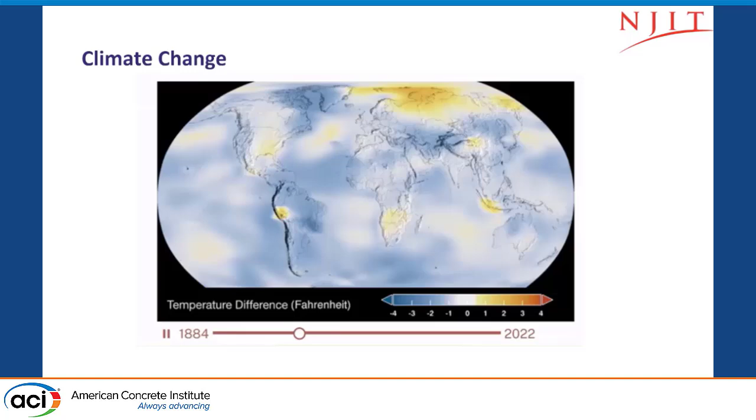We think this is a big problem, and most of those problems are due to the carbon, CO2, in the air. The climate change, as we can see here, the number of climate-related disasters tripled, and you can hear every couple of weeks about a new disaster everywhere.

The Myanmar earthquake, which happened a few days ago, was the worst—my master's and PhD is in earthquake engineering—7.7, this is something very, very catastrophic, especially since the Richter scale is a logarithmic scale. The rate of global sea level rise between 2006 and 2016 was faster than all of the 20th century.

45 million people affected by drought in Africa. More than 45 million people are struggling to find enough food across 14 countries.

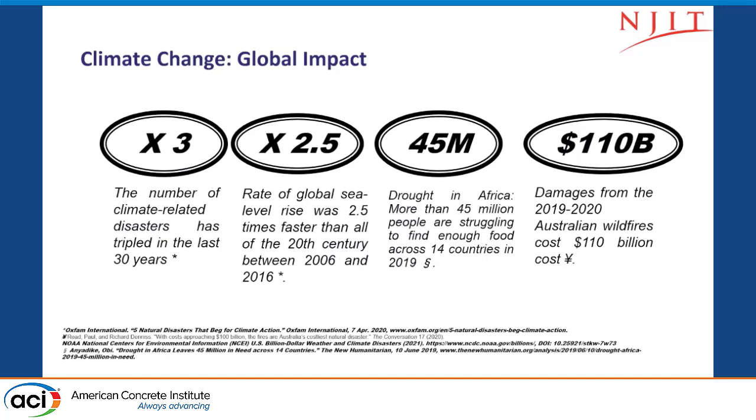110 billion dollars damage from the 2019-2020 Australian wildfire. We hear about wildfires everywhere, especially the one that happened in California recently. So this is a 110 billion dollar cost.

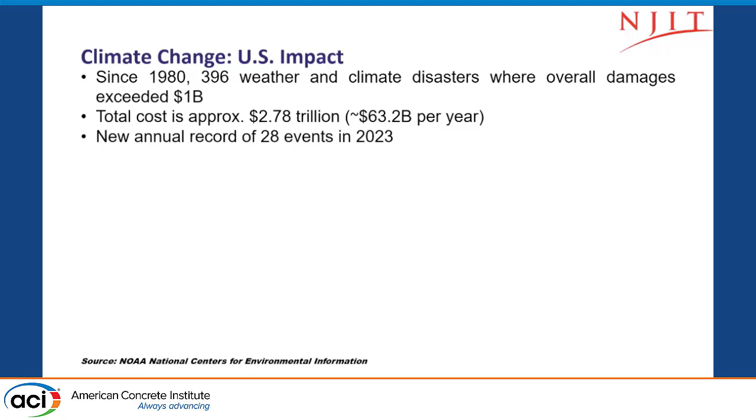Since 1980, 396 weather and climate disasters had overall damages past 1 billion dollars. Total cost of approximately 2.78 trillion dollars, which is about 63.2 billion per year. A new annual record of 28 events in 2023.

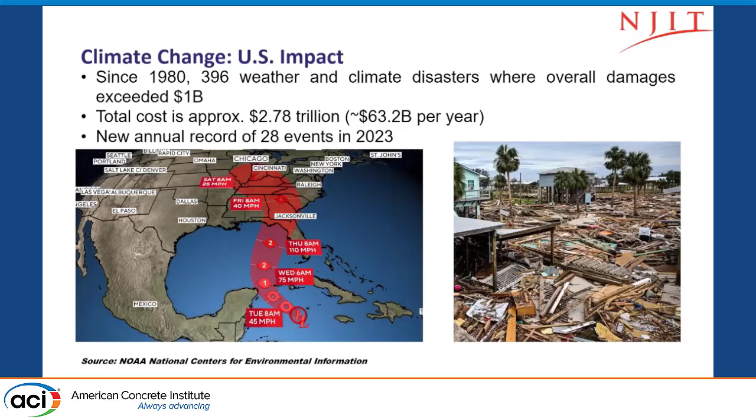That picture over there is Hurricane Helene, which happened a few months ago, September 2024, and the damage was huge. It went, as you can see, from south to north, passing by North Florida and the Carolinas. And this is a picture of the damage, as you can see.

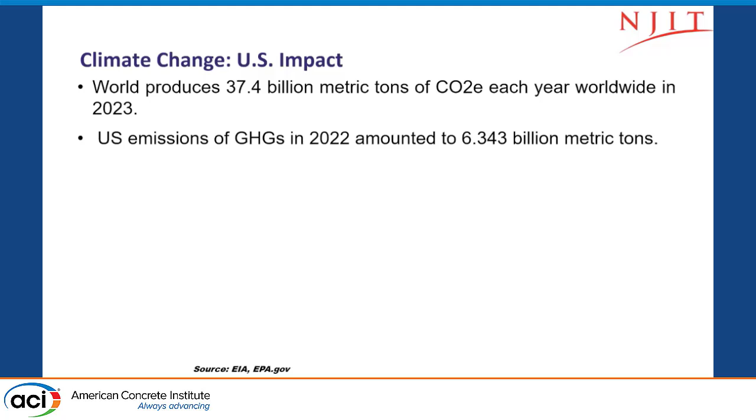World produces 37.4 billion metric tons of CO2 each year worldwide in 2023. U.S. emissions in greenhouse gases in 2022 amounted to 6.3 billion metric tons. The transportation industry is actually responsible for 28% of greenhouse gases in the U.S.

The global framework aims to reduce the impacts of climate change by limiting the warming to well below 2 degrees, and pursuing efforts to make it even 1.5 degrees Celsius. I remember, I live in New Jersey.

I used to live, by the way, near Toronto here. I got my master's from McMaster University, and then I moved to Ottawa, so the snow is everywhere. It was snowing even last week, I was there. And I live in New Jersey. I don't remember putting any salt in my driveway in the last two winters. This was something we have never seen—I have been in New Jersey for about 15 years. This is something very strange.

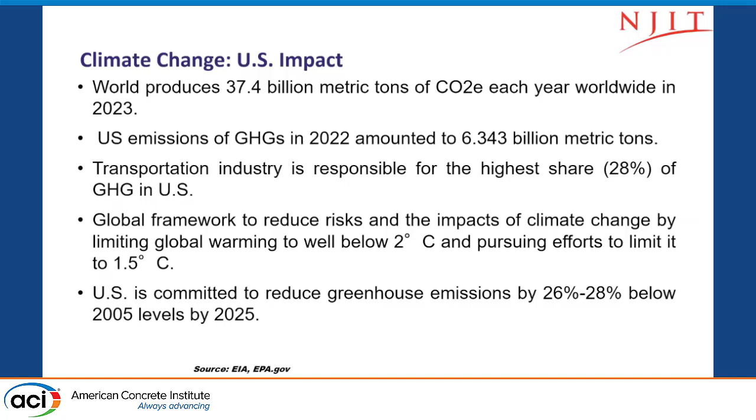So there is global warming, no doubt about it. The U.S. is committed to reducing greenhouse emissions by 26% to 28% below 2005 levels by year 2025.

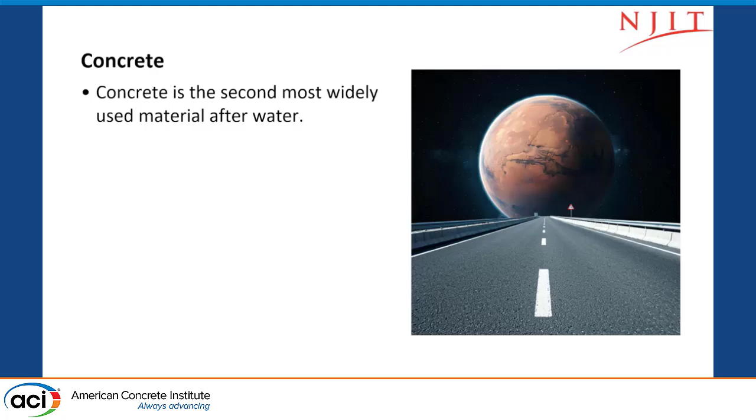Concrete, as we heard before from one of the presentations, is the second most widely used material after water. This is the first human-made material used. The global annual production of concrete is about 500 billion cubic feet, and the concrete produced annually could pave a one-lane road to Mars.

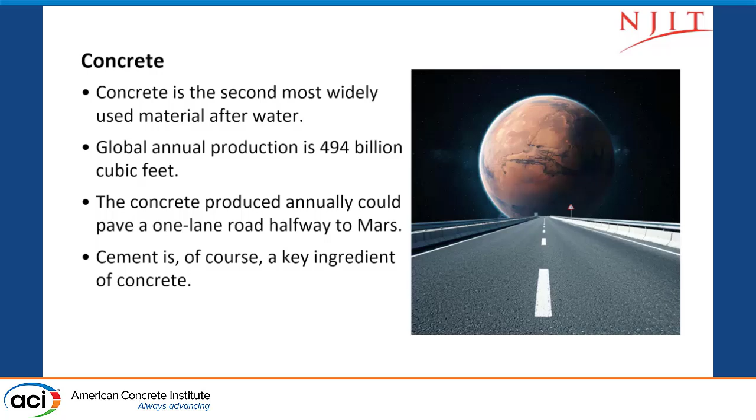Cement, of course, is the key ingredient of concrete, and cement accounts for 8% of CO2 emissions on the global level. As you can see here, this is a picture of the contribution during cement manufacturing for the CO2 from one stage to the other.

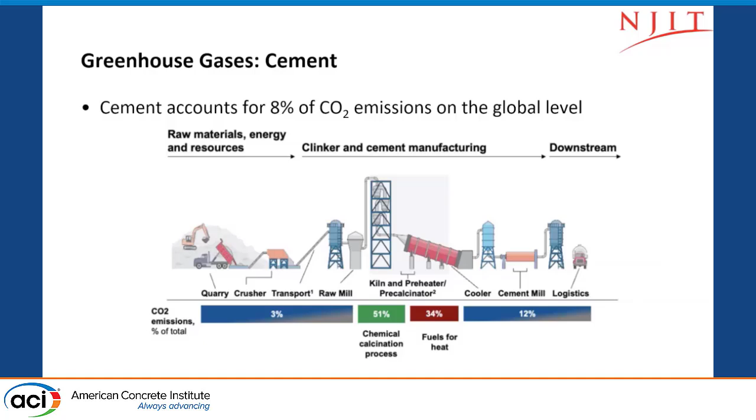They always blame cement for CO2 emissions, although there are other factories—even the car muffler emits more CO2 than cement. Plus, the concrete absorbs back some of those CO2, about 50%. So if the cement industry produces that 8%, the concrete is going to take half of it back. This is a graph from one of our papers published about lightweight concrete.

It shows the CO2 emission in million tons globally and in the United States. You can see the numbers increasing between 1960 and 2020 globally, and the United States are doing their best—although people are still fighting about global warming and this stuff—but we're doing our best to reduce CO2 emissions compared to the global effort.

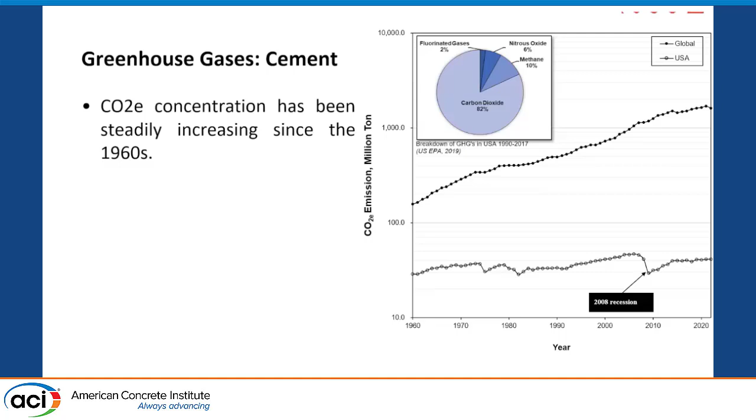CO2 concentration has been steadily increasing globally since 1960. Major greenhouse gases are CO2, methane and nitrous oxide. CO2 traps heat in the atmosphere, leading to global warming.

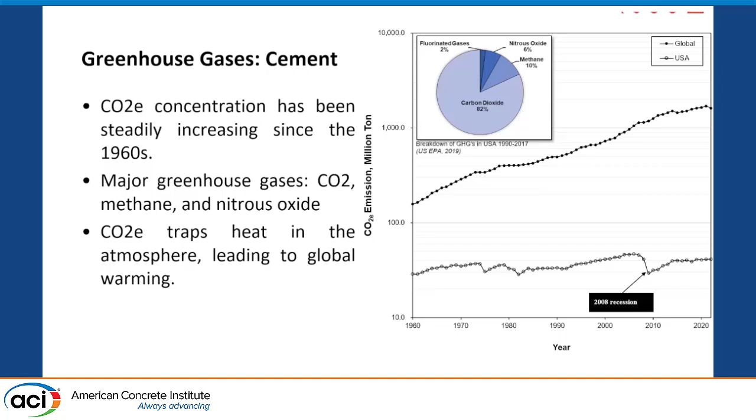So this is the supplementary cementitious material: fly ash coming from the coal industry, blast furnace slag coming from the iron industry, and silica fume coming from ferrosilicon.

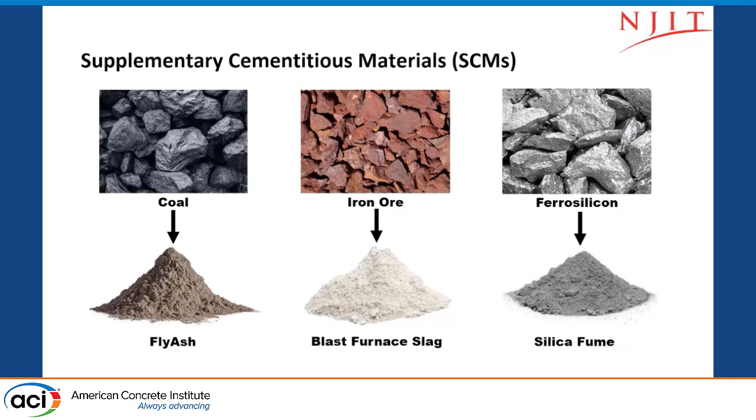And again, the challenge is our job—we cannot work from home. We have a concrete lab, and the students have to work in the concrete lab.

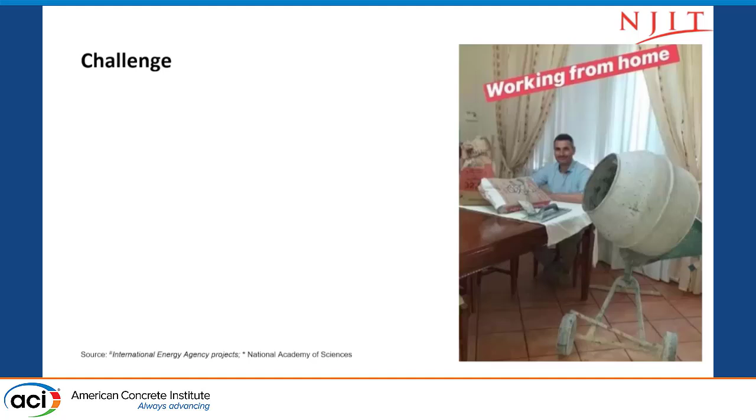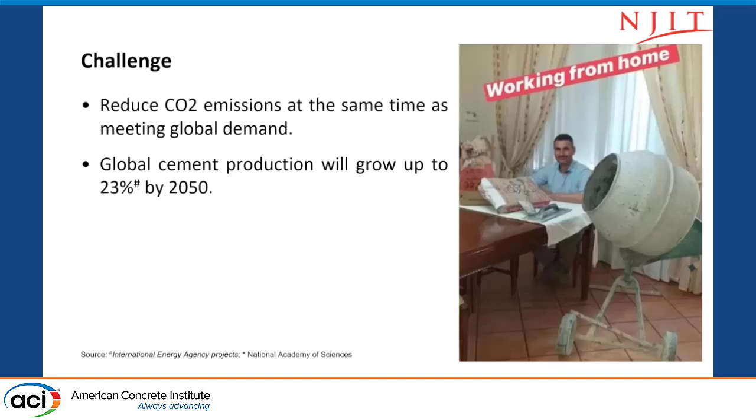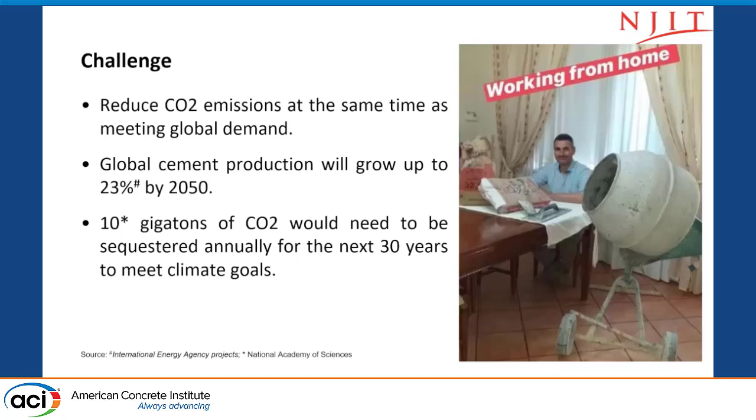They cannot produce concrete at home, and this is why we are working 24/7 to produce the concrete. So we have to reduce the CO2 emission at the same time as meeting global demand. Global cement production will grow by 23% by year 2050. 10 gigatons of CO2 would need to be sequestered annually for the next 30 years to meet climate goals.

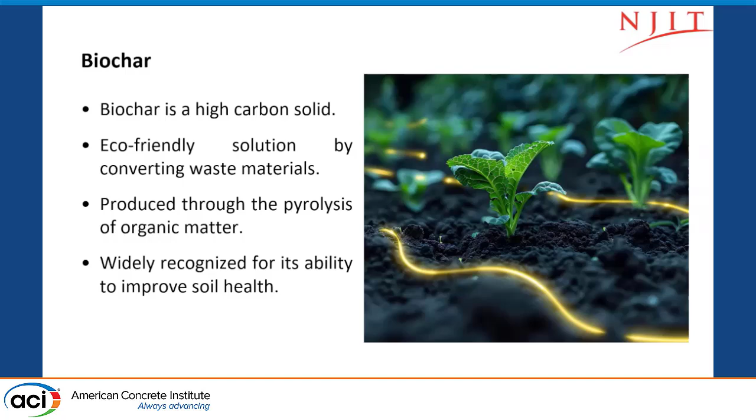The biochar, as we heard in detail, is a high carbon solid, eco-friendly solution made by converting waste material through pyrolysis, organic material widely recognized for its stability and ability to improve soil health and other things. Biochar sources can come from different materials.

From rice husks, rice hulls as we heard before, from wood, from sludge, from straws, anything that we burn. In a previous presentation we were talking about getting biochar from burning some type of flower rising on top of the Nile River in Egypt. This is another source of biochar - you burn anything, and then after that it's full of carbon, and you use it.

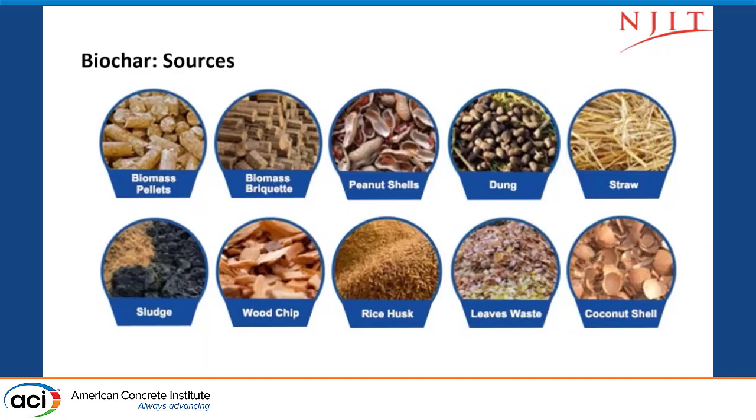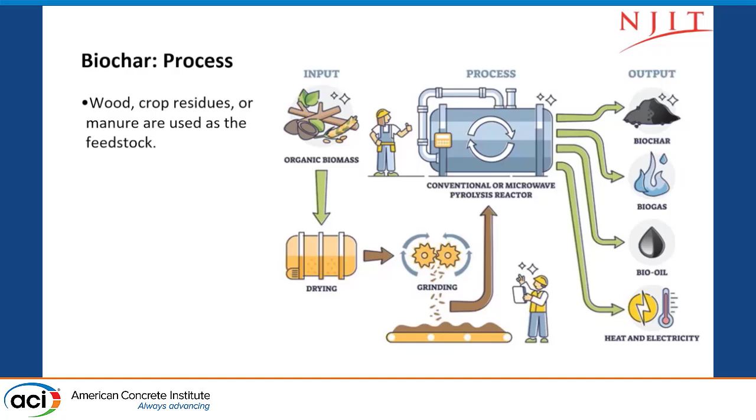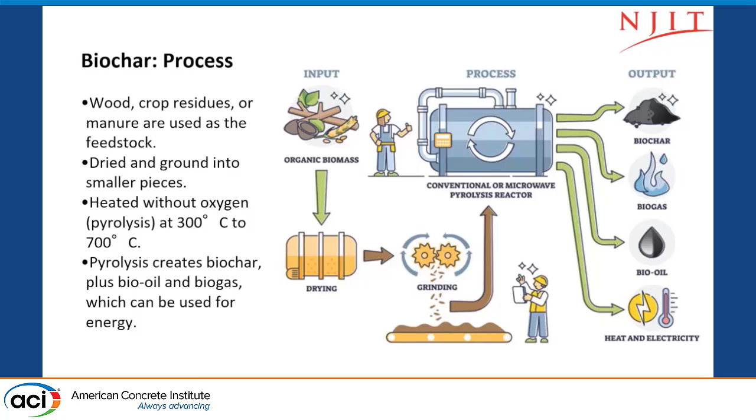So as we can see here, this is the process. I'm not going to go through this in detail because you guys heard people better than me discussing the biochar material and what's the input and what's the output. It's used in transportation applications, composting, and soil stabilization. We heard that, carbon sink, and water treatment as well. So all of those are uses of biochar.

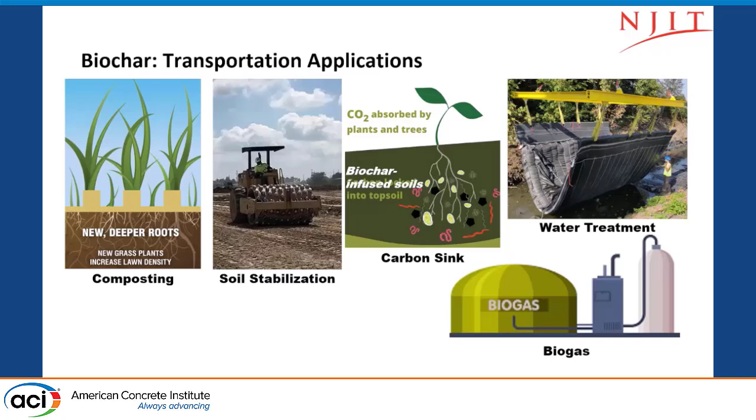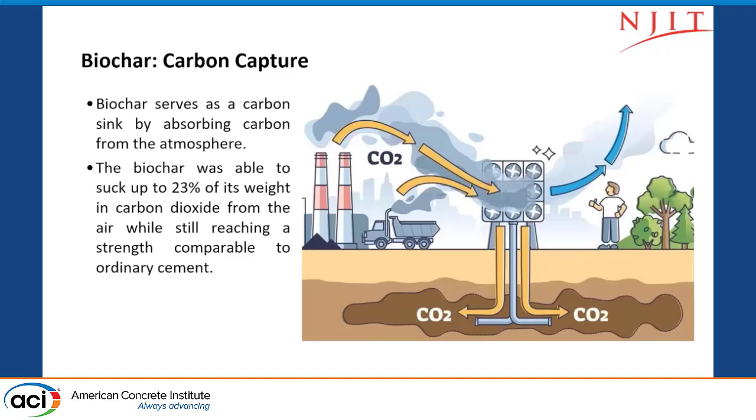The carbon capture aspect is that biochar serves as a carbon sink by absorbing carbon from the atmosphere and putting it underground. It was able to suck 23% of its weight in carbon dioxide from the air while still reaching a strength comparable to ordinary cement.

Then we are going to move to the concrete. Since I am a concrete guy, what are we doing with the biochar, adding it to the concrete? What is the effect of that?

So we started a long research project sponsored by a company based in the United States, but it has its main branches overseas in India, and they are doing the rice hulls a lot in India. So we got the biochar from there, which has about 60% carbon in it. We got that biochar from them, and we said we are going to do it because they wanted to expand their production here in the United States. They were doing just planters and embankments and stuff, and they would like to know if we can do structural elements using the biochar. So we said that's fine.

We are going to start with doing the compressive strength and all of this stuff. So it's a long process. I was expecting that we are going to finish it soon, but actually the funding problems and stuff are delaying it a little bit, as you always know the situation right now.

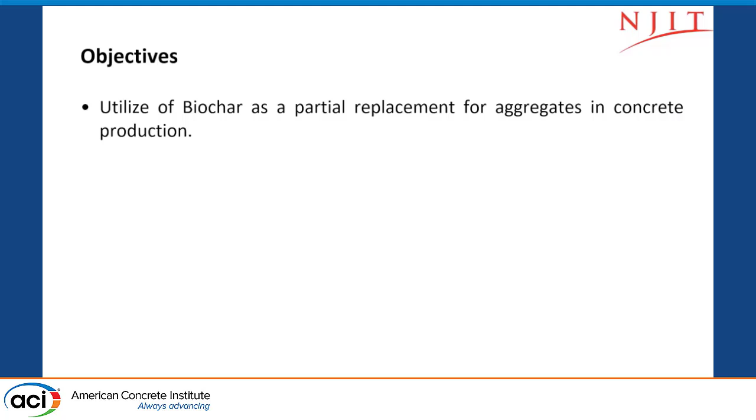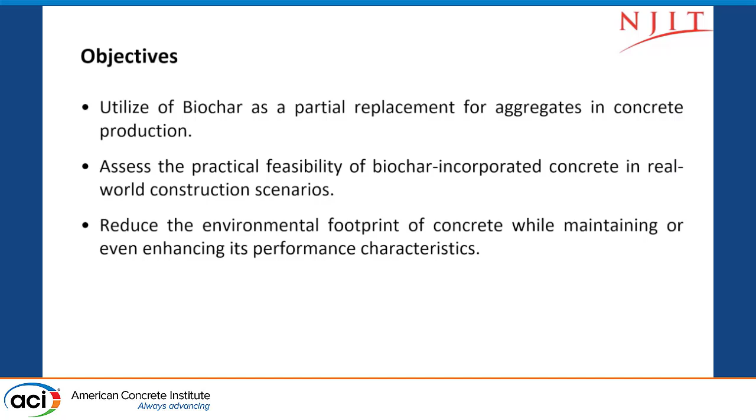So the objective of the study is to utilize the biochar as a partial replacement of aggregate in concrete production, and to assess the practical feasibility of incorporating biochar in concrete in the real world, reducing the environmental footprint of concrete while maintaining concrete integrity and characteristics.

So we went to the New Jersey Department of Transportation, and we focused on Class B, which is the main class used in building concrete structures. That Class B has a design strength of 3,700 psi at 28 days, and they have something in New Jersey DOT called verification strength. To get that design, they said we need to break the cylinders at higher psi to make sure that we are going to reach, or be on the safe side, because there are lots of uncertainties when breaking the cylinder and putting the concrete into reality in the structure itself.

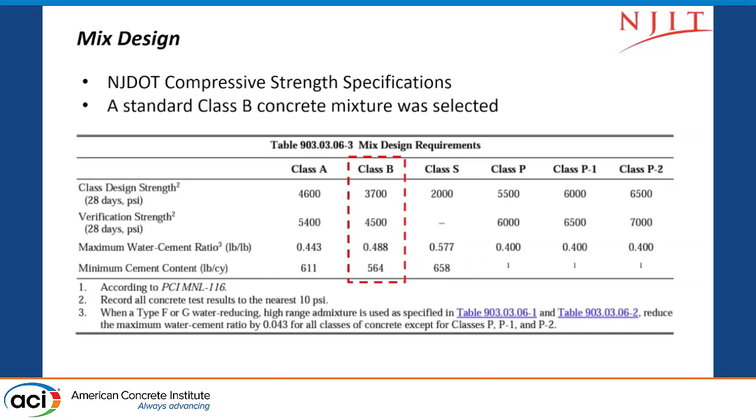So there is verification strength, which is a little bit higher than the design strength, and there is a maximum water cement ratio, which is 0.488, and the minimum cement content, which is 564 pounds per cubic yard.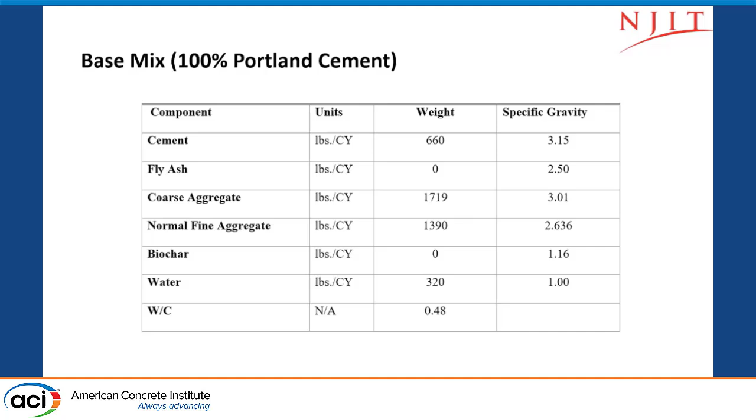So we did, again as we heard before, a 100% Portland cement specimen, and those are the characteristics of our specimen. We have fly ash, coarse aggregate, normal fine aggregate, and then the biochar and water, with the water cement ratio, and those are the specific gravities on the side. We wanted to check the concrete properties: workability, air content, density, and strength.

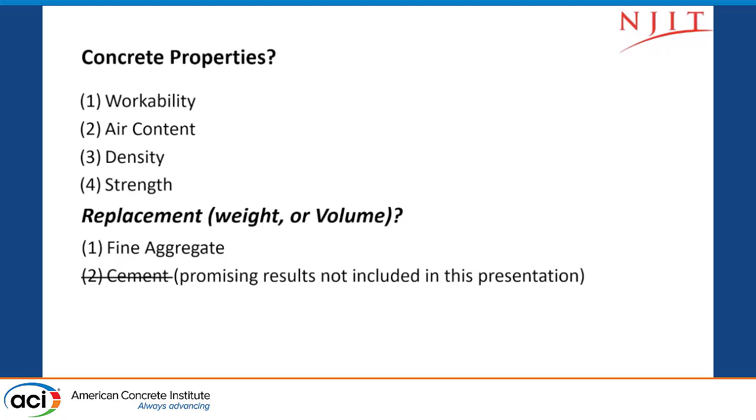We started with those things, and we said we are going to do replacement by weight to fine aggregate, and then replacement by weight to cement. We did the fine aggregate. We are working on the cement right now, but we didn't get the results yet. So it's promising results, but not included in this presentation.

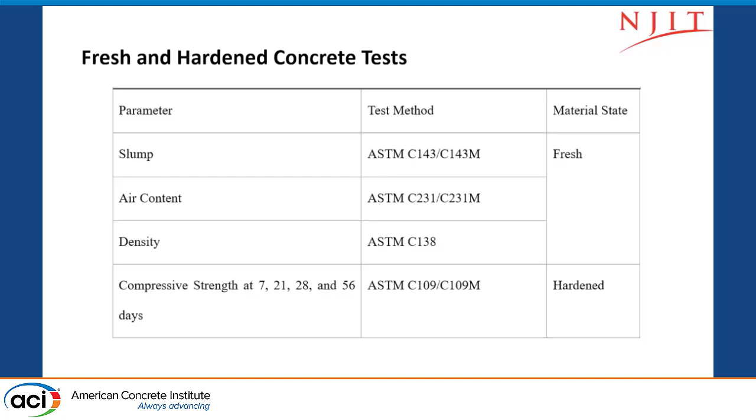Of course, we followed the fresh and hardened concrete tests from ASTM: slump, air content, and density. And we did the compressive strength at 7, 21, 28, and 56 days. So this is the test results for the slump.

On the left-hand side is the base mix. After that, we did the replacement by weight again for fine aggregate: 5%, 10%, 15%, 20%, 25%, and 30% fine aggregate by weight.

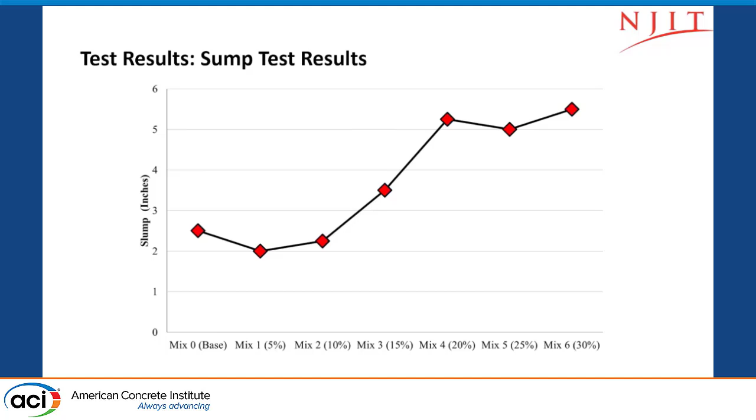We can see that the slump is increasing by increasing the percentage of biochar replacement.

For density, as we heard before, biochar is a porous material, so we expect the density to go down, from about 150 to about 117-18, when we increase the fine aggregate biochar replacement to 30%.

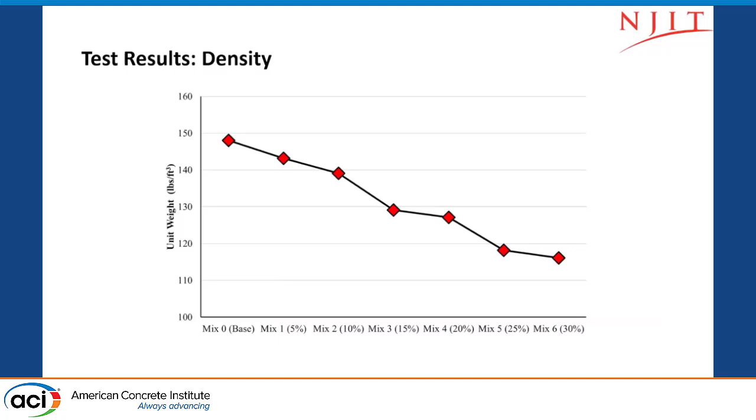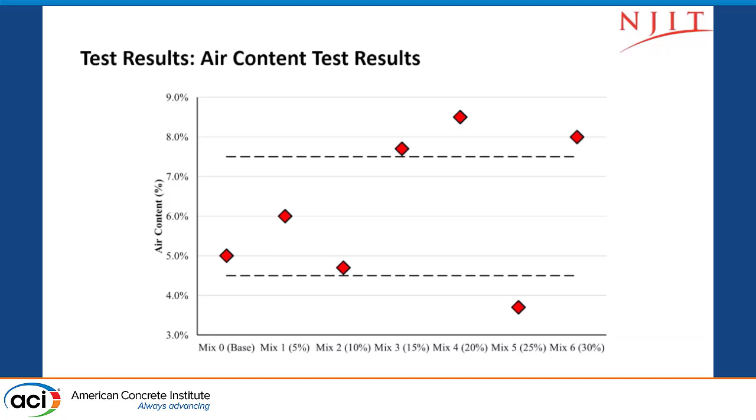We have a couple of anomalous points here at the bottom, but we put them in anyway.

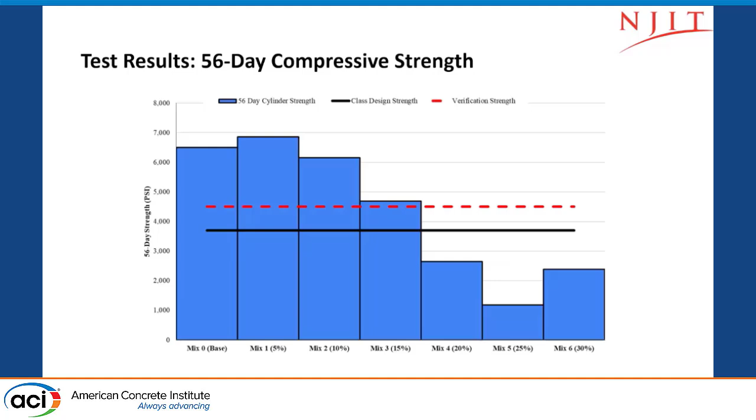This is the 56-day compressive strength, again up to 15% we are on the safe side. 15% is on the verge, and then after that everything is going down.

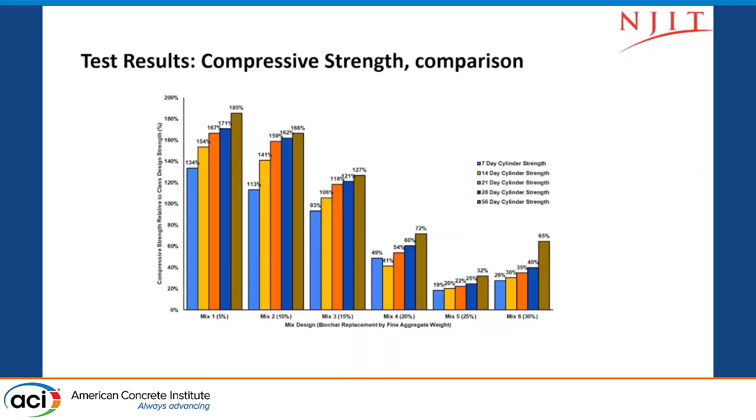As a conclusion of our study, and we still have more results that I don't have right now - we would like to thank CSIT, the Commission for Science, Innovation and Technology, a big organization in New Jersey, for funding this research. The company who donated the biochar is called Solace, originally based in India.

The conclusion of this study is that biochar absorption varies due to material source differences, as we showed it varies based on the source. I actually received a biochar sample last week; they said it has a minimum of 90% carbon, so the factors are endless.

I would like to try this 90% biochar. I don't know the cost of it - I think it might be higher - but they said our biochar at 60% is very low, so I should try the 90%.

We are still open for all factors and suggestions. Biochar concentration at 15% as a fine aggregate replacement has met or exceeded the strength requirements. High biochar content as a partial cement replacement, which we are working on right now, and fine aggregate replacement, has many lower-strength applications.

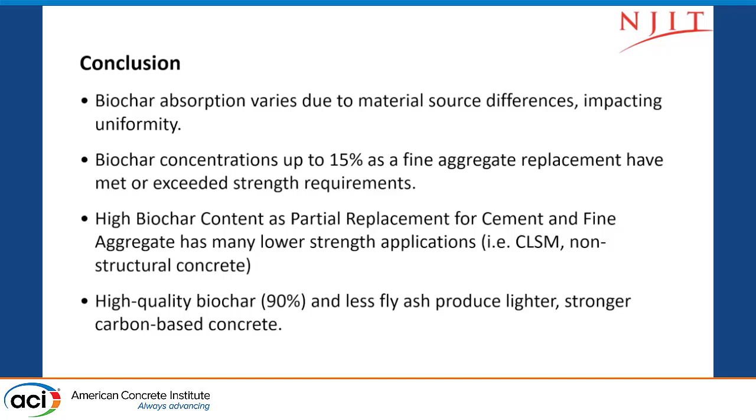Internal curing by biochar assisted the cement hydration process by absorbing and releasing water. We used a high range water reducer because of this - when we started, the biochar absorbed all the water, and even the drum wasn't rotating smoothly because the biochar absorbed everything.

We were surprised - this is a very water-absorbing material, so we had to increase the HRWR. A water reducer is recommended to counteract the biochar's higher absorption rates, and higher biochar content increases air content levels and other effects, as we saw in the pictures.

In future work: cement replacement by fine biochar, which is well-ground biochar, and both fine aggregate and cement replacement combined. We would also like to do a life cycle assessment, including the cost part, because we see it's like FRP - the cost of FRP used to be expensive in the old days.

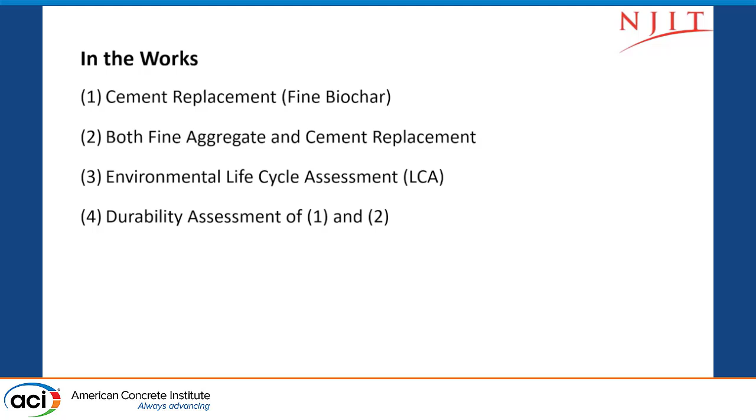Now FRP is cheap. It seems biochar is going the same way - it was expensive and now it's getting cheaper. Also planned is durability assessment of both the cement replacement and fine aggregate replacement.

I think that's it. If you have any questions, I'd be more than happy to answer. Thank you.